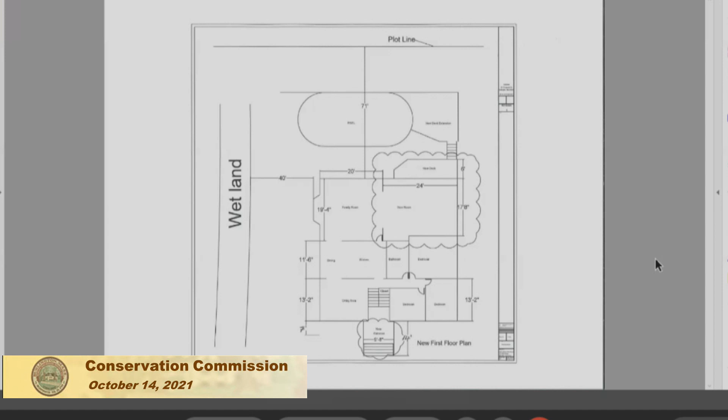Eileen, do you have any comments for the commission? I'm sharing the plan that Rudy and Maher provided. What's marked wetland here is actually a locally regulated stream, approximately 55 or 60 feet from this proposed new addition on the back. As Rudy says, it's going to be on sonotubes. It's a pretty built-up yard and property as it is, so I don't see an addition on the far side of the house being an issue.

Do you have any concerns at all? I don't. Let's see if there's any further comment from the commission. Gail, do you have anything further on this one?

I just have a couple questions. One is about the plan. I see that you're having that new deck going off the new addition. Are you keeping the other deck? I don't see that on this plan. Is the existing deck staying or is it going to be removed?

No, it's staying. The new addition, so there is an existing deck around the pool, but it's not big. We're going to extend the existing deck to connect it with a couple of steps from the new deck on top to the lower deck around the pool. I think you meant the existing wood deck attached to the room right now, or the pool side? The one closest to your neighbor's house.

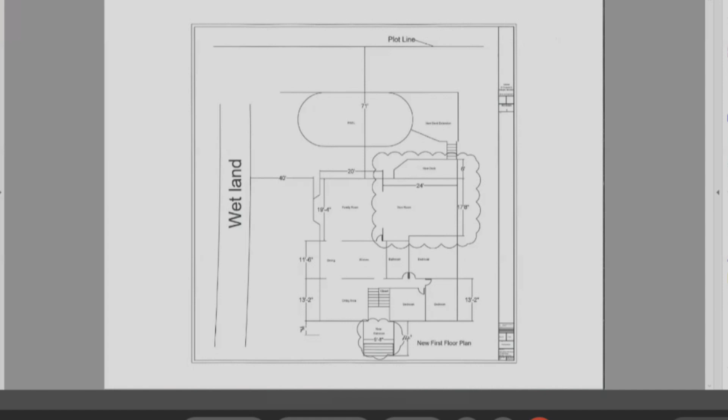The only question I have is for the commission and our staff. Did you see any opportunity for either picking up stuff that shouldn't be there or improving the wetland as part of this project? I didn't see too much myself, but I thought I'd ask in case any of you recall anything. No, I did not notice anything that could be addressed.

Oh, Larry, can I just get a clarification? Because I didn't understand that the old deck was coming off. Is that definitely happening? I think that's what he said. No, the existing pool deck on the other side of the pool is staying the same. Oh, right. Yeah, I just thought the deck said it was attached to the house and being removed.

The current deck, which is between us and the neighbor, this is going down, and the room will be replacing this area of the deck. But the deck that's already attached to the pool is remaining, yes. Okay, and you said you were thinking, Eileen, about did you see any possible improvement to the wetland or anything that needs to be addressed? Well, I thought the removal of that other deck would have been an improvement, but that's not happening.

Maher, when you said you were thinking about taking down some trees, you hadn't mentioned that before. Where are those trees? The tree will be in the back, behind the pool, not towards the wetland, but behind the decks of the house. There are some very old trees, and some branches are falling, almost dangerous. So I'm not planning to take the whole trees, but maybe trimming, and whatever you allow me to do, I will do.

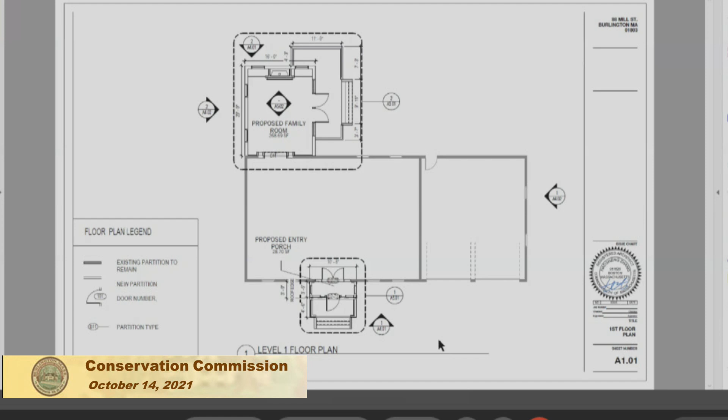Gail: I know you haven't lived in the home very long. Are you planning to do any tree work on the property or put any plantings in? Applicant: No, because as you saw yesterday, it's all flat land. There's almost no tree, only one Christmas tree there, and we will keep that tree as a Christmas tree, it can be decorated. Gail: Yeah, I love that tree, definitely. Applicant: We don't have any other trees on the land.

Gail: Are you planning to plant anything? Applicant: Yeah, is it possible to do that? Gail: That's good. If you would like some suggestions, since you're in an area near a resource area, it's always nice to plant things native to this area that will do well and are good for wildlife. You can contact the office, they have a list of plants that would do well. Applicant: Okay, yeah, after the addition we will definitely do some plant work.

Applicant: We want to build like a decent garden there, tomatoes and trees, hydrangea, whatever. Gail: Just make sure you have a fence, the rabbits and deer like that too. Applicant: Okay. Gail: All right, okay, thank you, Gail.

Indra: Thank you, I have one question. The addition, the foundation would be on sonotube or are you going to dig? Could you ask the question again? Sorry about that, the foundation of that addition, will that mean you're going to dig and put the foundation, or would that be on the sonotubes?

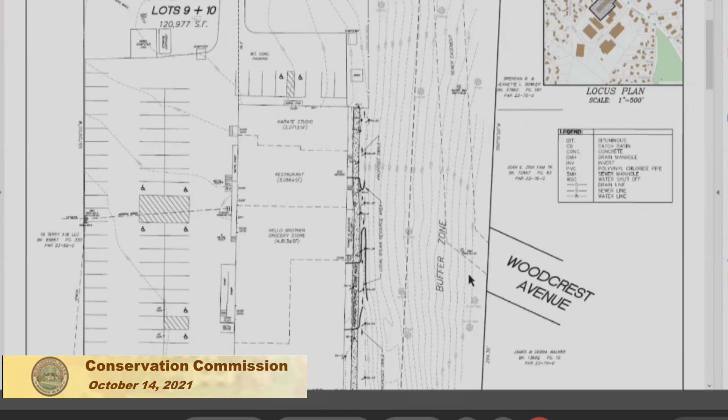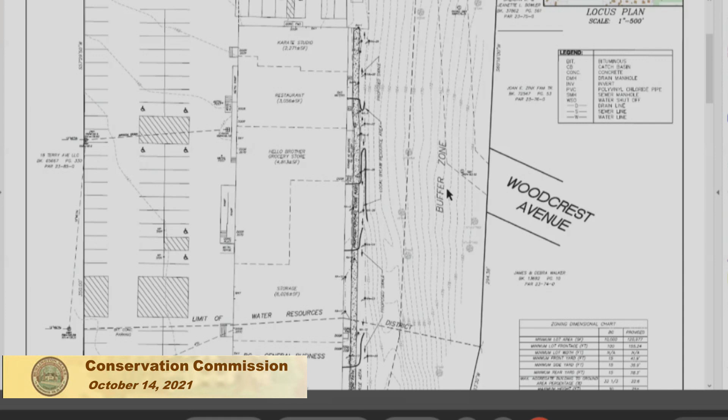This project is filed under your local wetlands bylaw and not the Massachusetts Wetlands Protection Act. The property is an existing developed site with a large commercial building and an expansive parking area. It's a paved parking surface, and the lot itself is about 3 acres in size. On the west side of the building, between Woodcrest Avenue and the existing building, there's a very steep slope. This slope discharges stormwater to the building, and if you go out there after even a relatively small rain event, there's quite a bit of standing water that has come off of this slope and is trapped by the existing footprint of the building.

Portions of the area where the water has become trapped have started to grow a wetland plant community. Other areas are just mucky and dominated by standing water that doesn't move very well. In the past, the owner of the property tried to drain the site by creating a hole down just above Cambridge Street, hoping that the water would flow parallel to the building and end up in this hole. And while that does happen to some extent, the drainage problem is bigger than the hole is at the current time.

When I went out there to look at it, I was sure that it was not a bordering vegetated wetland, that it didn't have the 3 criteria I typically look for, which would be soils, vegetation, and hydrology throughout the area. But I did feel that it was likely to be protected under your local bylaw, which is a little looser in its definition. So to the best I could do, I did mark the limit of the local wetlands on this site, and you'll see that the delineation comes almost right up to the edge of the building.

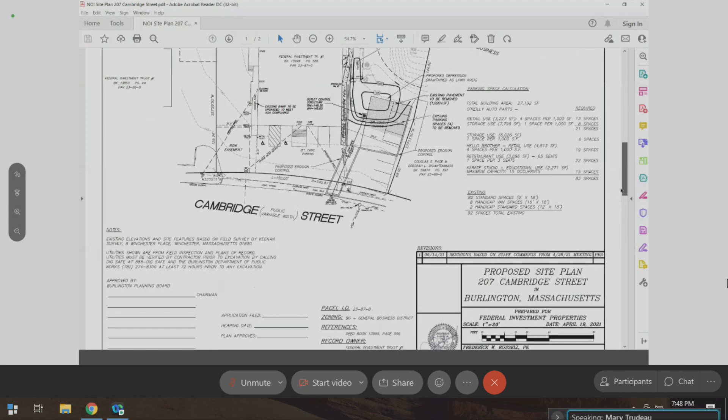Are there questions from the commission? All right, thank you. John or Eileen, do you have some comments for us on this one?

I do, but first, Mary, could you explain the design of the basin and the overflow, and where it goes, for the commission? Yes. Currently there's a hole that was kind of an informal detention basin out there. What we've proposed is to carry flows along a better defined channel running parallel to the building, ultimately allowing these waters to enter a new stormwater management area, a detention basin that would be larger and have greater capacity than the existing system.

As water levels rose, they'd be contained in the detention basin until reaching the elevation of the outlet control structure. Flows reaching that point, rather than overtopping the basin and running overland into Cambridge Street, would then be hard piped into the existing drainage structure out in Cambridge Street. So flows would stand and rise in the basin, and at a certain elevation be piped out to the existing stormwater management system within Cambridge Street.

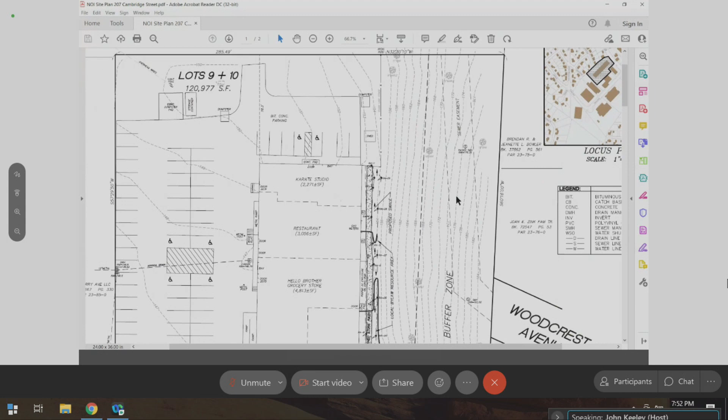It's an improvement to an unfortunate situation.

So even though it will disturb some regulated wetlands under the bylaw, I think it's kind of a necessity to approve something like this.

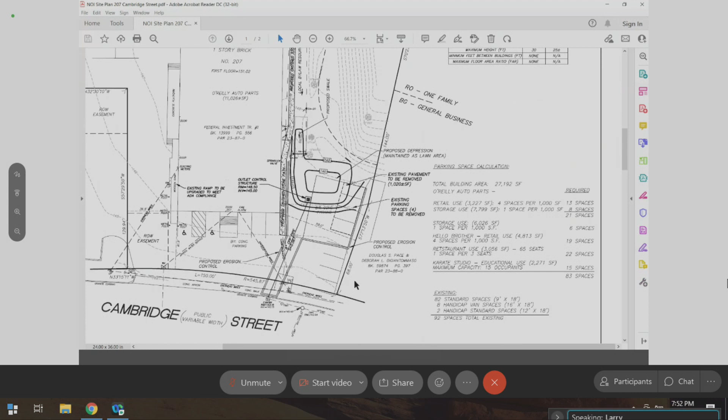Okay, all right, let's see where this discussion goes. Thank you, John. Gail, would you like to start off on this one?

Sure. So it seems like if this works, it should be an improvement. Is that a 2-foot depth to this detention basin, or is that what I'm reading? Yeah, okay, that it's approximately 2 feet in depth. We also have an issue with high groundwater, so we're limited in what capacity we can provide on-site storage. This seemed to be the compromise that we could engineer.

So it's not meant to infiltrate. This is just for temporary storage, and then any overflow would drain off. Yeah, I would say it's more of a retention basin at some elevations, and then it only detains water as it gets higher.

So how is this going to be maintained? Because I assume, next to the building, there's not much going on there, but it's not an area that's mowed or anything like that, which is good. But is this an area that is going to be mowed? I think it's going to be very similar to what it is now, that there is some need to have access from these rental units out, a second access.

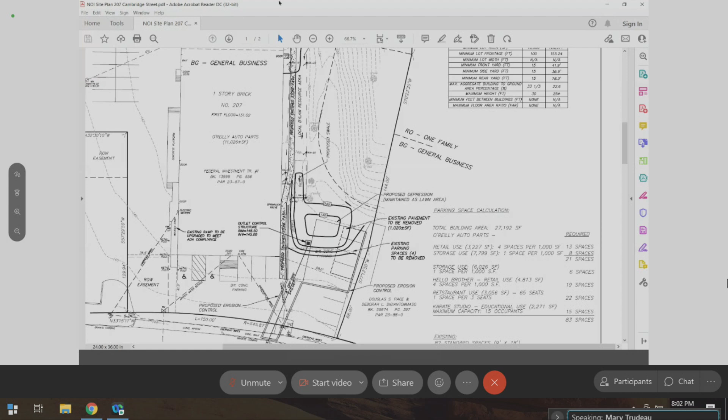Okay. And the thing is, is there any problem with having a basin there and emergency access at all?

Well, we are before the planning board, so I would assume we'll get comments from the fire and emergency services departments and will address that. There's parking, there's paved access around most of the building, it's just that one side. I'm not sure whether they would need to access that for firefighting.

Well, it's just something I noticed. It's not conservation related, I'm just asking you to put it on the list and address it with the appropriate people. Okay, it's not our concern on that one, I don't think. So that's all I have, mainly those two things that are conservation and stormwater related. Yeah, I'll have Fred look at that.

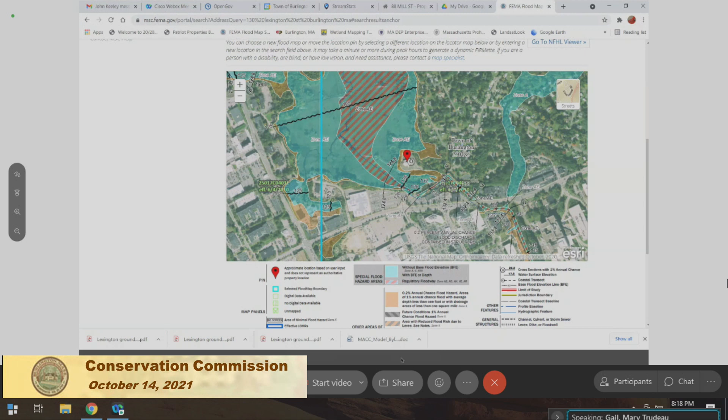Sorry. Any trees that were removed, I think we should look for replacement. And I'm a little concerned about this having to be a managed meadow. I think it would be better just to let it grow back, and whatever grows there grows, because at least the experience that we've had, whenever people start managing things, they do a little bit too much over-management of vegetated areas. So I think it should just be left to grow, and whatever woody plants come up, let them be. If that's not appropriate, then please correct me. But it just seems whenever anything's managed, everything is whacked down, and next thing you know it's a manicured lawn or something. But I do like the placement of the stones, the boulders in front of there, so that hopefully that will demarcate that and not cause any future problems. That's all I have for now.

All right, how about Indra? Yeah, I didn't get that. So you said you're going to bring more fill, 30 cubic yards? Yes, to bring it to the grades shown on the plan, which are the darker spot grades that range just over 125 to maybe 125.5. We would need to bring in approximately 30 more cubic yards of fill.

And you will do that without taking fill from the other property, right? You're not going to- No, that would be using that fill as well. Most of the fill is on the Islamic Center property, but there is some fill material on the Caruso property, and we have calculated the Caruso fill as being spread onto the Islamic Center fill. Oh, so you will do that, plus you need 30-plus cubic yards. Yes, yes, so there would be a total of 400 cubic yards, give or take, of material brought onto this site since the violation began.

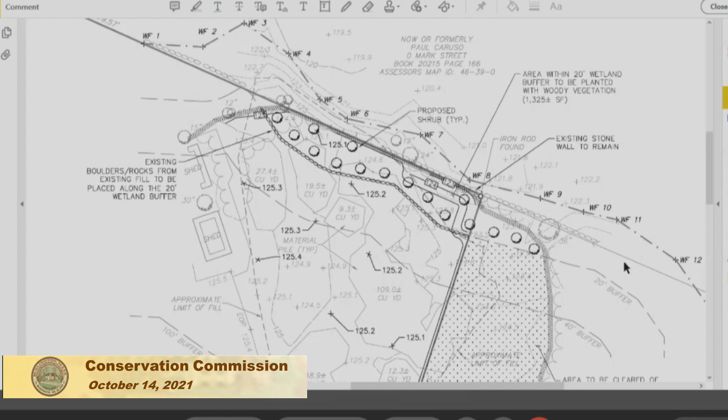Okay, I had a little trouble hearing you, so I'm just going to repeat what you're saying, just so that I'm clear. You're saying that the 20-foot no disturb zone on this site is not particularly effective because it's located above the stone wall, and that you would like to see it expanded to include a planting area that would be used for mitigation, replacement of trees.

Correct. In other words, I think the way you've got it drawn is too little for replacement of enough trees to replace what was taken down. Okay, I can look at that. All right.

Regarding, Gail, regarding your comment about managed no disturb zone. Larry, it's really hard to hear you. I don't know if there's something wrong with your microphone or something else going on in your room. No, there's nothing on. It's sort of odd. That's better, okay, I'll stop moving around. Maybe that'll help.

Regarding your comment about managed, are you suggesting that we shouldn't plant whatever no disturb zone that we come up with? Or are you suggesting that whatever we plant, we shouldn't manage it after it's planted?

Yeah, so my point was that Mary had mentioned that this would be a meadow-like area that would be periodically mowed, and I'm just concerned that if you start having that happen, everything gets plowed over and nothing ever gets left to grow and restore the wetland value, any kind of pollinating plants or any kind of plants of any value. And so that would just be kind of short grass.

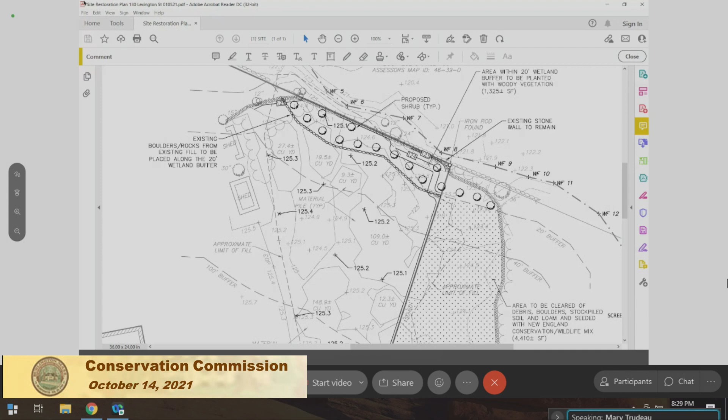So what I have here is we're going to get more specificity on how the no disturb zone is to be handled, on the number of trees, and we're going to get some clarification on the floodplain. My understanding is that regulations allow us to consider relevant information that contributes to the floodplain, so the source of the information on a proposed floodplain may be considered relevant. We'll have to take a look at that.

And I made the comment that the no disturb zone should be sufficiently large from the top of the boulders to have sufficient space to do our plantings to replace the trees. Yeah, so that would require moving the boulders further up gradient to create a larger planting area. Right, right. Okay, anyone have anything else?

So Larry, what does the commission think of Mary's suggestion about issuing an enforcement order against the owner of the adjacent property? Well, since we see a violation on the owner's property, it sounds like the commission should seriously consider whether we want to ask our staff to issue an enforcement order. I think that's a logical way to get their attention. Obviously, the issue will be presented to them and resolved all in one fell swoop, so it shouldn't create any hard feelings, I would think. It's just eliminating, as Mary said, the legality of trespassing at this point.